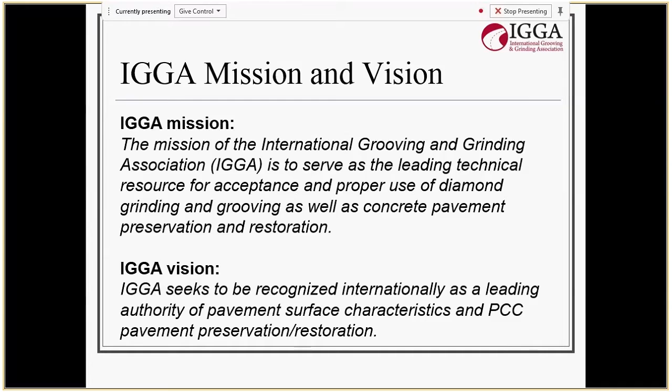And we're a small organization. We have offices located in New York, Chicago, and Arizona. And it's a small group. We have an engineer, Larry Scofield, which I'm sure many of you have met and worked with over the years, who's been involved for quite some time. And we have consultant promoters that work with us time and again, and many of you may know Dan Frentress, who used to be the executive director of the Concrete Paving Association of Minnesota, who is now a consultant. He oftentimes provides services to our organization as well, and a great addition when he does.

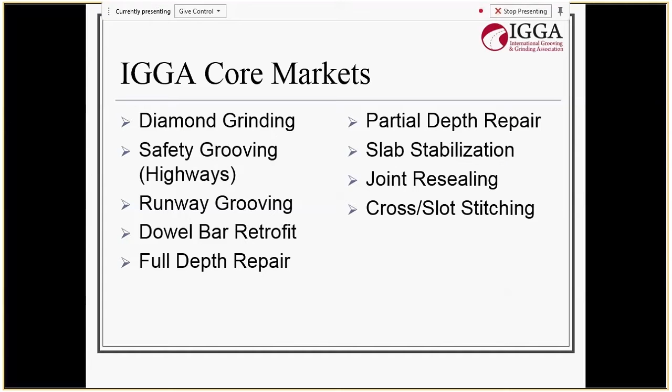And that boils us down to who do we work with and how do we operate. We have a number of strategic partnerships. Of course, the American Concrete Pavement Association is one, and there's a number of chapters that are affiliated with the ACPA, and we work very closely with those organizations, such as we do with the Concrete Paving Association of Minnesota.

And the unique difference here with this group is the fact that we take industry, associations, my members, and we work fully with a number of different states involved with the NRRA. And that allows us to do some things that we can't otherwise do with the other groups listed here. One of those, of course, is the partial depth repair research that we've undertaken as the NRRA.

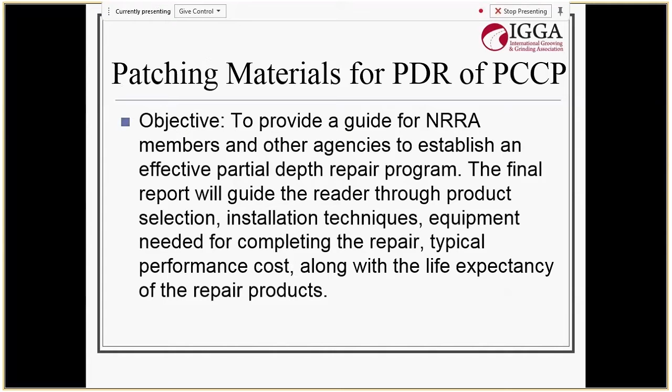And what we have is the objective here, and this was discussed yesterday, so I'm not going to go into detail at all related to the project itself, but just to give you an idea of the patching materials for partial depth repair program that I was involved with, you can see what we're looking to come up with. And essentially what we've done is gone out and created some faux repairs and then invited a number of different manufacturers to come in and to bring their products and to show their wares, if you will.

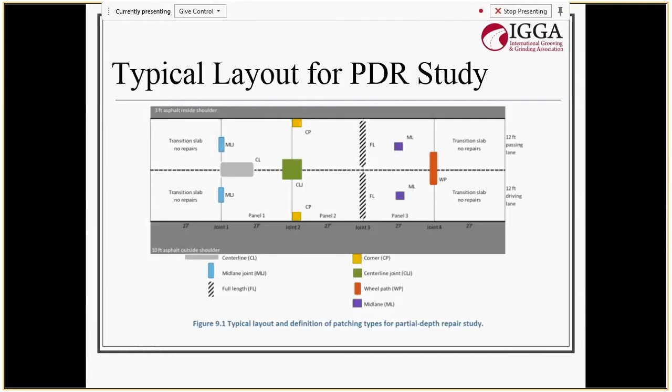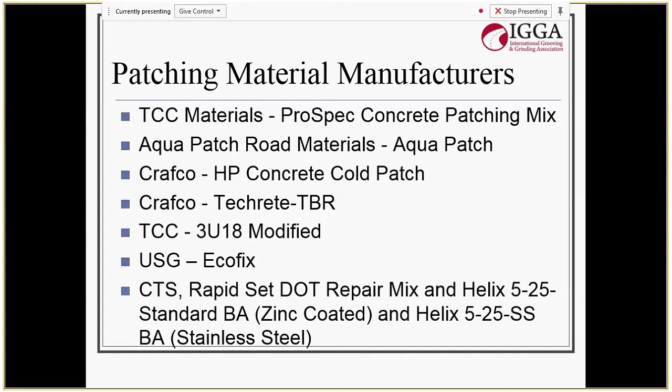And I am sure during the process of installing these products, there was a lot of uptight, intense people. And rightly so, okay? They're representing their company. But again, you have people that are trying to do the best they can to impress and to show the departments of transportation that are there on site and that will be reading the reports years later, how good they can help sustain the system.

So at the end of the day, with this particular project, this is what we're looking to have as outcomes. We're looking to have a guide that provides information to DOTs that are either involved, that are in this room here today, or that choose to pick up this guide years later, and they can learn how to establish a partial depth repair program. They'll know what to expect from some of these products and so on.

Just really, really cool stuff, beneficial stuff that I think you'll see years worth of benefit as we look forward, as we move down the line, as we head towards retirement at some point in time. Not soon enough. We will remember what we've done here today, last year, next year, and so on.

So that brings up the what's next. What are we going to do here? Okay, so we have products planted in the ground. Now we're going to monitor them. And we're going to come up with a report and provide benefit to those that are in the room and outside of the room as to what we're doing. But the way I view this, it's much broader than this.

What's next? Okay, so we've built these sections. Well, right now, in this very room, we have manufacturers from big, well-established, name-brand companies that are here trying to listen to find out what your needs are. And while we were having coffee just a few minutes ago, one of these individuals who's in this room right now said, man, I've got some stuff. I just wish I knew the needs better.

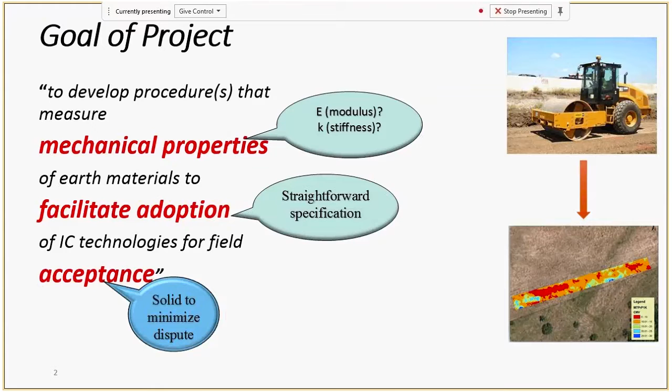So what's the goal of the project? Very quickly, first we wanted to develop a procedure that measures mechanical properties. What that means—this is coming out of the RFP, not my word—they want to measure stiffness or modulus of the material with the roller. They want to basically facilitate the adoption of the IC technology, meaning it has to be a straightforward, transparent specification so you can implement it. And the last one is for field acceptance. That got us a little bit, because as soon as you're talking about acceptance, real money gets involved, so we have to be careful to minimize disputes. We don't want every project to go to referee. So it's a little bit of an ambitious project, but nevertheless we're lucky enough to have gotten the project to work on.

So the other group I have to thank is Caterpillar—Brian is here, thank you. In order to do what we wanted to do, the conventional IC roller is not enough; we need access to more information from the roller. So we approached CAT, and they were very generous and agreed to provide us additional information, namely the load—if you want stiffness, you need to know load and deformation. One without the other, you cannot do it.

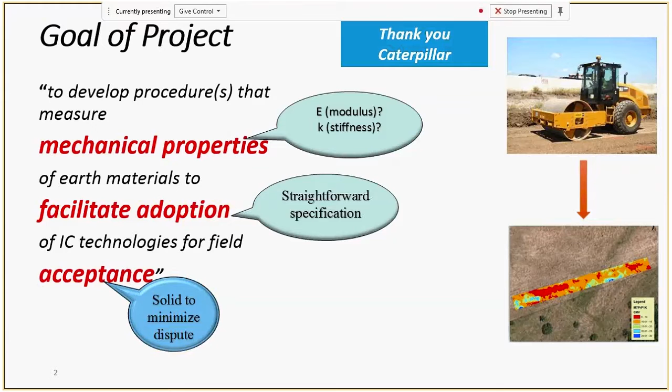So this is the experimental roller, and they worked with us very closely, and we got the data that we needed to collect. That's what we were doing.

So when we are talking about getting to the model, what we do right now is great for uniformity. To get the material property, you need to have a model. You have to have a mechanistic model.

For the last 10 years, we have been working, thanks to the generosity of a lot of different funders, on a finite element code that basically models the roller on top of the soil. Models are great, they make good movies, but they are only as good as the prediction.

So we have to calibrate these models to do it. I gave a presentation last year on some of the runs on the supercomputer of the UT system, which is the second fastest in the world right now. Some of them take around 8 to 12 hours for just one run.

When you have a vibrating roller that is moving and you're trying to do it, we don't want to do that for every project, so we have to come up with something. The first step is to get the model and to answer some of the questions.

The basic question: what's the depth of influence of the roller? That's very fundamental. Things like that. But we have to have a calibrated model to answer those things.

And that's where the MnROAD sites came in. We started doing instrumentation at the site to measure what the response of the soil is at different levels. I'll go faster.

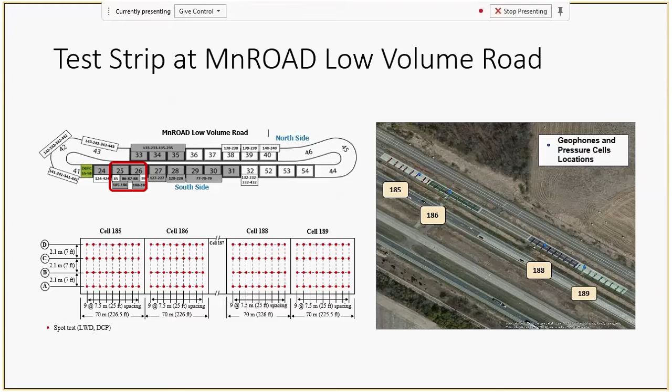As a geotechnical engineer, the first thing we learn is that soil is darn variable, and we cannot do anything about it - we can manage it, we cannot just solve it. We manage it.

So we put the instrumentation in place. This instrumentation is thanks to our friends from the Federal Highway Administration - we have a project from them, and we developed some instrumentation together.

So we have a system that simultaneously measures the vibration of the roller and synchronizes it with the vibration of the sensors we embedded in the ground, so we know the relative location of the roller. We just have the roller operate, measure it over time, and synchronize the distance.

What sensors do we use? We have an accelerometer - let me point at the thing so you can see. This is the whole system. You basically put it on the handle of the roller, and there's an accelerometer that we install.

These are the accelerometers - industrial accelerometers. These are the 3-dimensional geophones. They measure velocity, and we put them at different levels.

This is the pressure cell - it ended up that we didn't have the pressure cell in the program, but because travel costs were minimized by doing all the testing in one place, we took the travel money and bought the pressure cells and put them into the ground to get more information. We put the 3D geophones at 2 levels, and the pressure cells at different levels.

Our sensor here, the accelerometer, is on the roller. There's a GPS here, and there's a GPS next to these sensors - these two GPSs talk to each other to synchronize so we know where the location is.

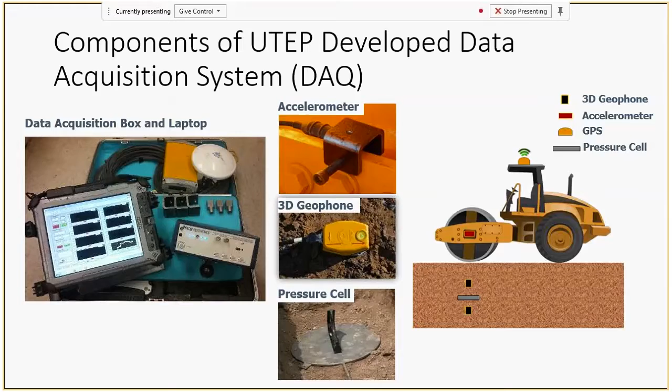Okay, so these are some of the pictures that you see, some of the work. We have a group of 4 old-timers and 1 newcomer. Mike was the newcomer—he's a guy with a PhD who's not afraid of pick and shovel. I was complimenting him; he was very helpful. And then we have Bob, Doug, Jack, and Len.

These guys don't sit in their office, they come and help the researcher. We're used to people showing us to the side and saying good luck, if you need something come find us. These guys actively bring the equipment, and very quickly we put in all the sensors into the ground, and they protect it.

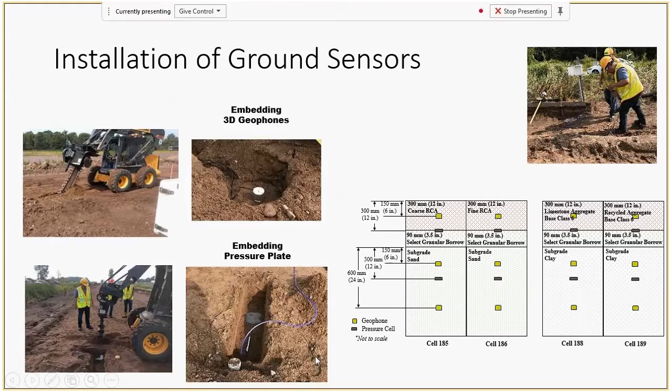So these are some of the types of information that you get. This shows you the vibration of the roller, the sensor on the roller. This is a close-up of it. And these are the vibrations of the 3 geophones at 1 level—actually there are 6 of them. You see that the vertical one is the white one; there's nothing, then you get a response, and then after it you lose the response.

This is a close-up of what you do, and no equations. Okay.

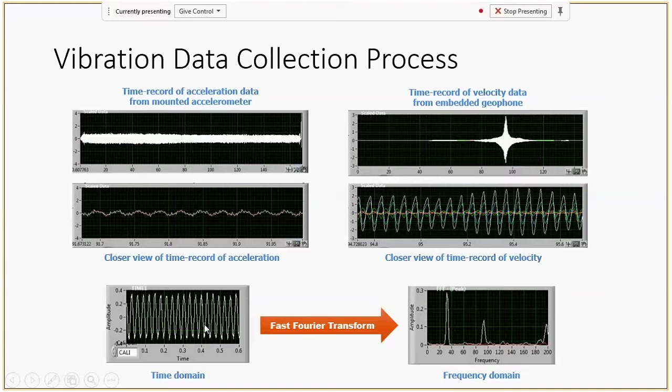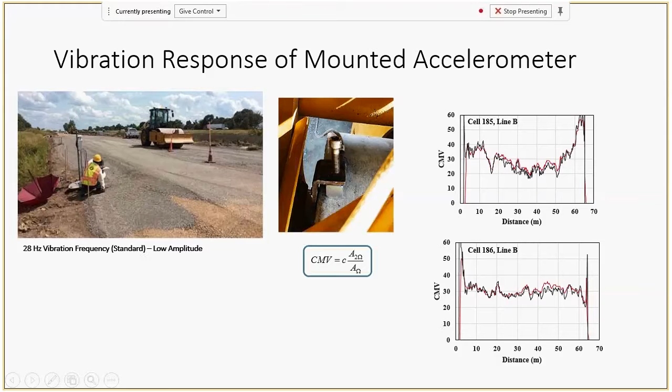So the first thing we did was make sure that all the systems are working the same. This shows what the output comes from the CAT versus the one that we get. They're fairly close, so we're comfortable that we can interchange the data between the different systems.

And basically this is one of the responses—this is the higher deflection, this is the one closer to the sensor. Now that we have that, we can go and start doing the calibration.

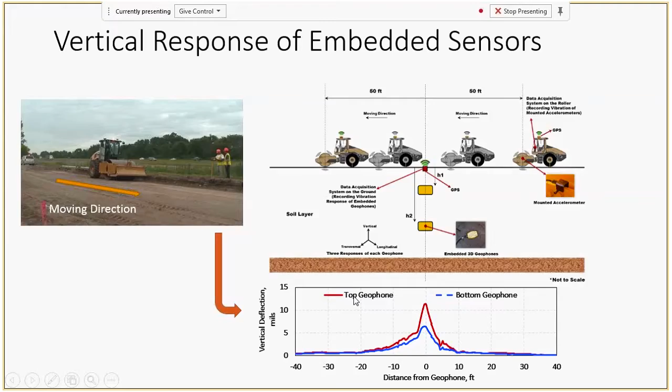Back to my model—these are the types of calibration we do. We don't believe in just accepting what the material does, so why do we design? That's one of the pet peeves we have as geotechnical engineers. If you design for 10 KSI subgrade, well, you should get 10 KSI, or design it for 5 KSI.

So we routinely see in some of the work that we do, the subgrade is designed, and you either get a lot more modulus out of it or a lot less. So you're either not putting enough pavement or you're putting too much pavement. That's one of the benefits we're going for.

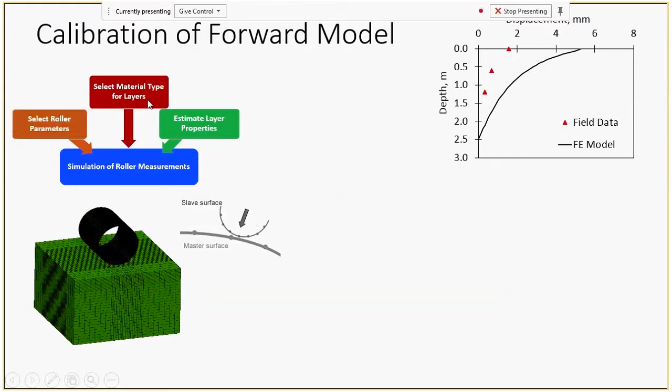And this is one thing we see—I'm wrapping up. The type of calibration you see, there are some differences. This is what the model says, this is what we are measuring, and this has to do with the fact that we use the laboratory modulus and the field modulus is different. So we have a transfer function we are working on.

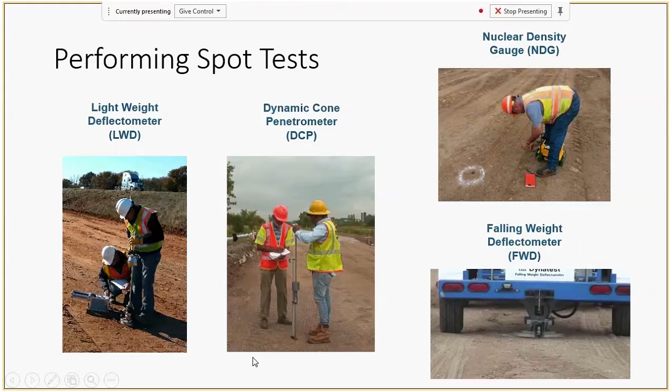These are the types of correlations we get, and basically we start mapping and looking at the different parameters. We do a different way of looking at the data, but that's beyond the point—all the field tests that are done.

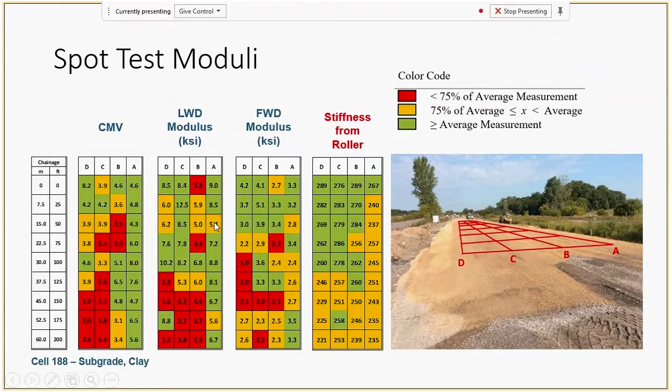And basically, one thing I'd like to show now—we start getting stiffness results from the roller for the first time, at least for us. So we can use it, and we thank you guys for that. Sorry, I went over. That's it.

No more. You're never going to do it again.

And what was wonderful about what Soheil did is he brought in research that was not being paid by NRRA or any of the states or associates, but stuff that we could tie back to related to MnROAD. They actually bought some of the sensors for us, so we didn't have to buy them. So that was a benefit also.

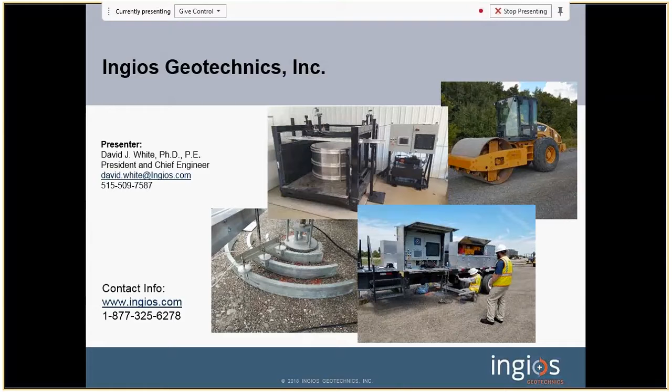All right, good morning. Thanks for the opportunity to share with you some of the things about our company and our involvement with NRRA. I live just down the road, so I couldn't pass up the opportunity to be involved in some small way on the project.

So I'll tell you a little bit about some of the things that we're involved with that we implemented on the project. The first technology is what we call our automated plate load test system. There we're bringing plate load testing out to the project in an efficient way. So we were able to perform some of those tests on a few of the different sections.

The middle image is what we call validated intelligent compaction. The first time I was out at the low volume test track was, I think, 11 years ago, when some of the research that MnDOT was working on was still in the implementation phases. So I've been involved with IC for quite a long time. Our company now has a kit and a system that we put on contractor machines to output in real time mechanistic design values. So we brought that and we're able to use that on a few of the sections.

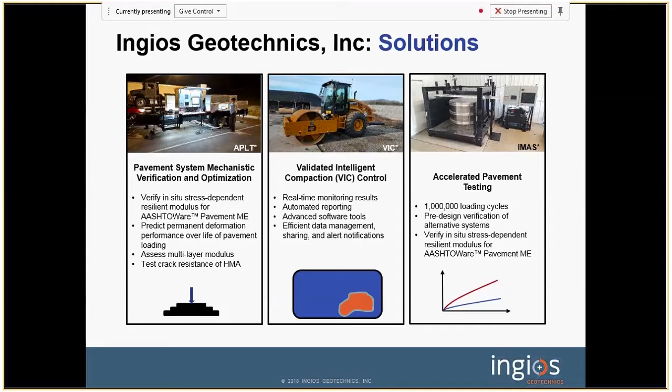To the right is our IMAS system. We do a lot of testing on geomaterials, trying to understand modulus, permanent deformation, stress relationships. And some of the things that we do with the APLT, we're not able to do with the IMAS system. The IMAS system, we can do 1 million cycles or 1 million ESALs over the course of about 10 days. So when we need to do accelerated testing, we bring some of those materials back to the lab.

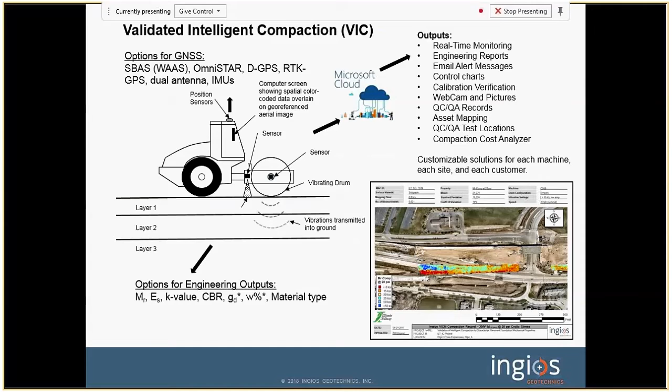This is a little bit about our VIC system. It's a little bit different than what's available with some of the other equipment. The outputs are modulus. It depends on what the project requirements are. We also have the ability to sense what material type we're in. So if we're transitioning between virgin materials or recycled or subgrade, that's actually collected with the machine using some advanced algorithms. And that information is all routed through Microsoft in a secure environment and presented back to the client in the form of a report. So we generated several of these for the sections that we were able to work on out at MnROAD.

Just a few more details in how this process works. There's an integrated sensor package that's installed, allows the operators to see information that's important, help them with their process control. It's field calibrated typically with APLT tests so that we have confidence and can provide a professional engineering report for the calibration. We display the results, we auto-generate reporting. That's such a huge element of intelligent construction, the data and being able to process that efficiently. Ultimately, we'll want to reduce risk.

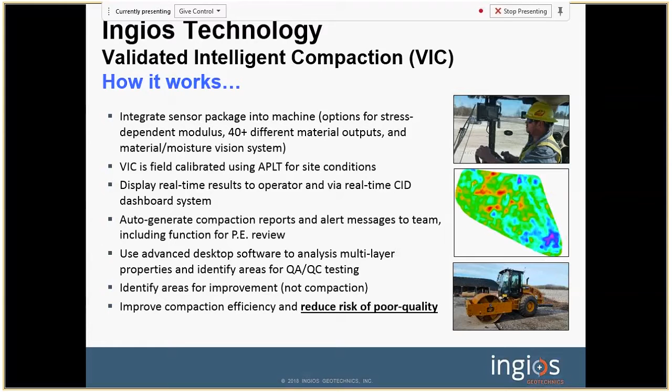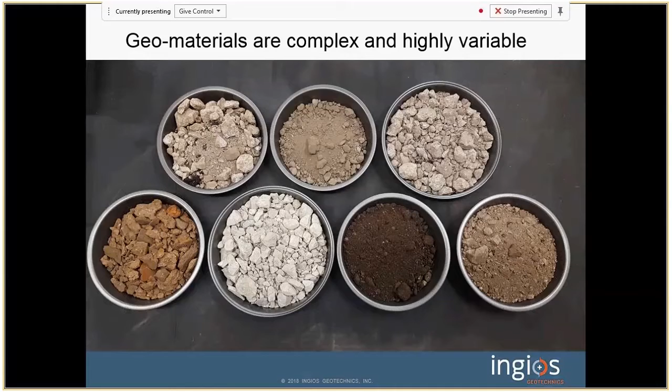When it comes to pavement systems, my mindset is you can't build good pavement systems if you don't have high quality foundations. I'm just convinced of that from testing all over the United States and other locations, that we still have a serious issue with pavement foundation construction. I'm going to talk about that later this afternoon and how we can overcome that. One of the issues is our materials are just really complicated. All of the recycled materials that we work with, the gradations, the blends of recycled materials, stabilizers, complicated stuff. So as part of the VIC, we've been cataloging and have calibrated 40 different materials now, covering a range of base and subgrade materials.

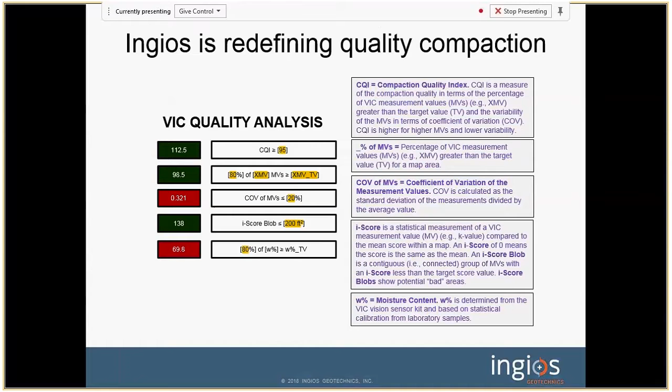Through this process, we've discovered that traditional methods of defining quality probably need to be updated a little bit, especially in terms of the changes that have occurred in design. So I won't go through all the equations here, but we've come up with a set of what we think are really important quality indicators for pavement foundation systems, and there's 5 of them. And typically we color code them red or green so that people can quickly determine if they've met those or not.

And I mentioned all this information's got to go to the cloud. So we've been working with government agencies to develop tools that work for their specific needs. So this display here is a set of icons that allow the agency to access different bits of information on the project. Some of it relates to what's happening right now. I want to see compaction mapping, to what are the trends over the last several weeks in control charts.

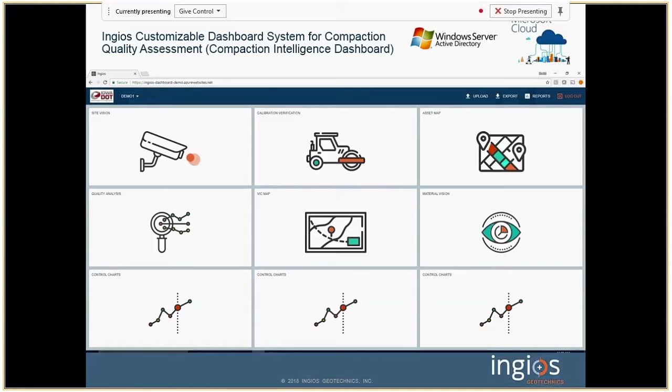And what was so interesting about this is all of this passed the tollway's traditional QC and QA methods, but built into this foundation system were some defects that we believe are going to cause distress to pavement systems. So we're really after trying to identify those, help the contractor locate where they're at, and then make decisions to improve those.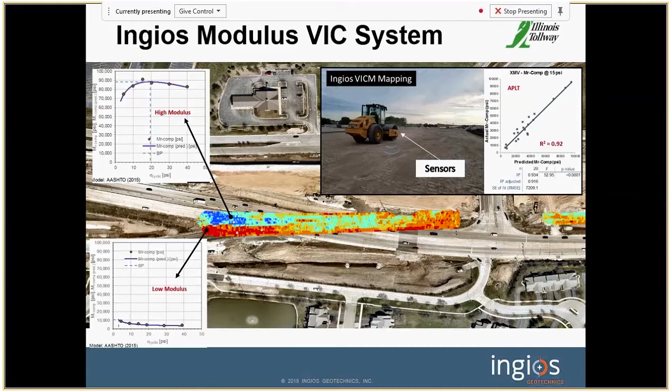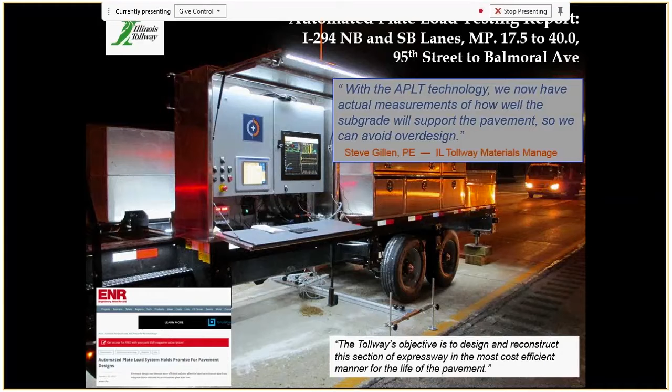One of the really interesting things, this might surprise some of you, is that resilient modulus isn't constant over the life of loading. It actually changes. So we've been trying to understand that and relate it to permanent deformation under loading as well.

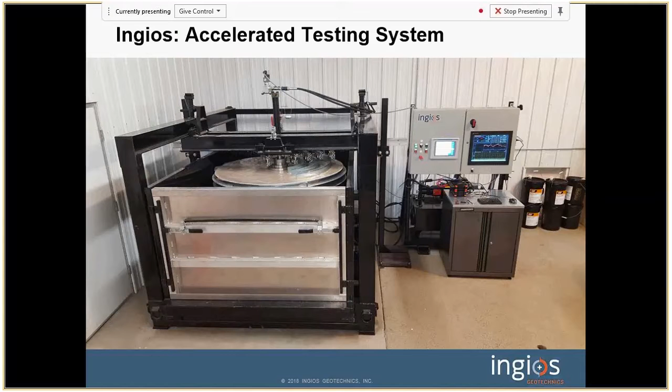I'll talk more about this this afternoon, but we have what we call tenets of measurement. And again, these are things that we believe are really important to making sure pavement quality is where we want it to be. Pavements last a long time, and a lot of it has to do with directly measuring what are the important engineering properties.

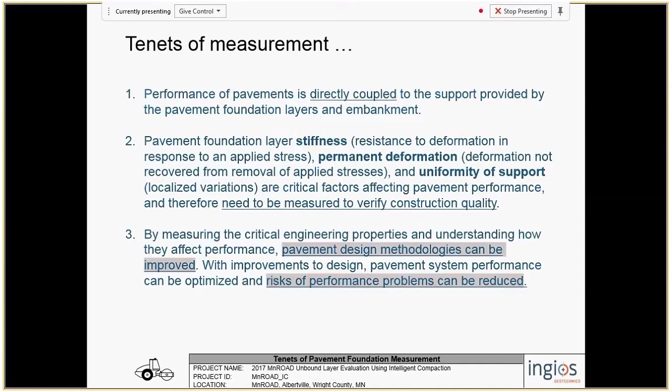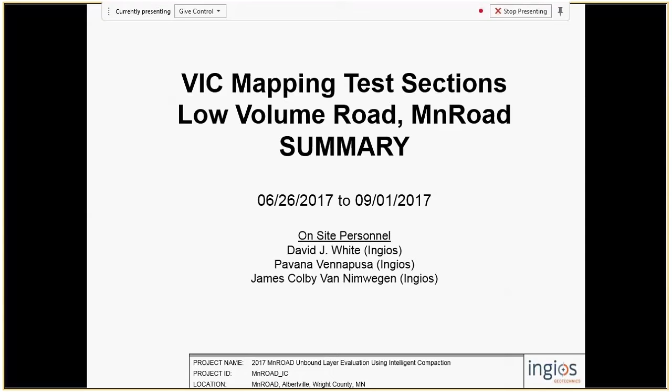So just to wrap up, here's a couple snapshots from some of the things that we saw out at MnROAD from this summer. You all know there were a lot of different sections. These are some of the profiles that we had the opportunity to do the mapping on. And it was really fantastic. Virgin materials, recycled materials, stiff subgrade, soft subgrade, and really, really soft subgrade.

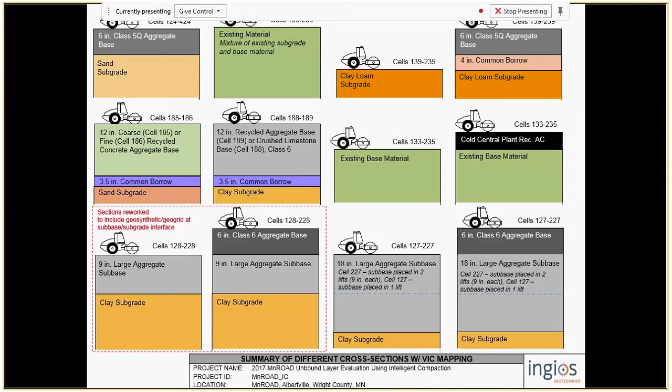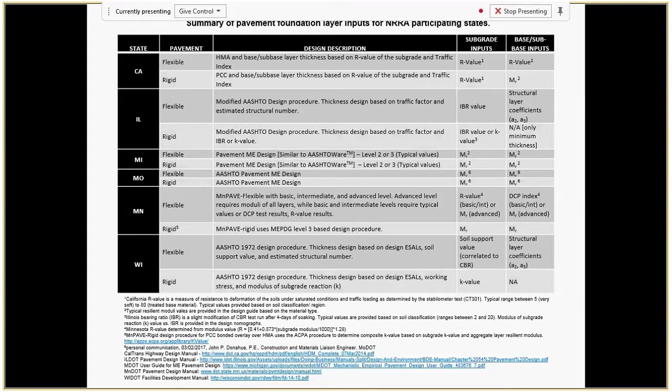We looked at the participating state design methods, because really what we wanted to do is be able to relate the measurements to whatever the design methodology was for those different states. So you'll see K value, MR value, IBR value, R value, CBR. The states that participate have different sort of mechanistic values of interest for their design.

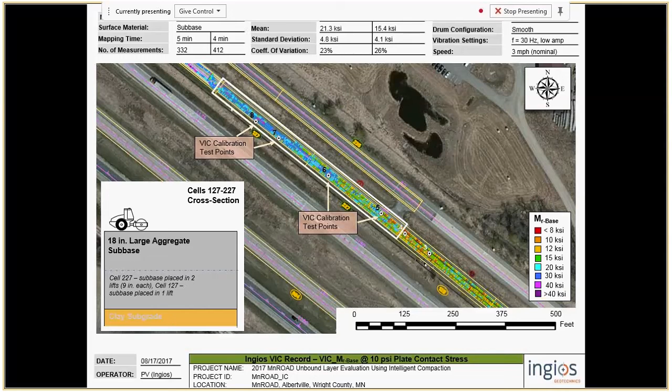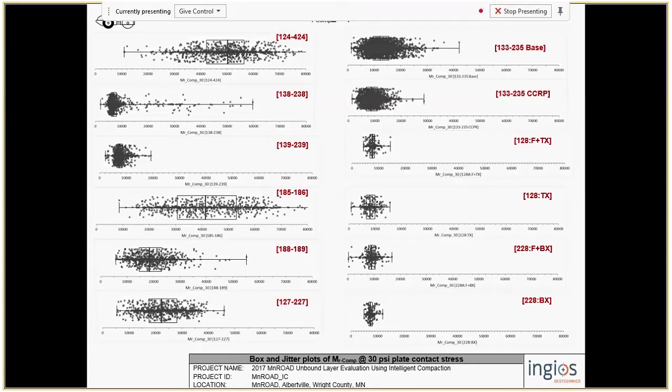In the end, from all these different sections, these are statistical box plots of modulus. So within a section, you can see the spread of the data is an indication of the variability. All the different sections were quite different. Some were uniform, some were highly variable. And that's data that we continue to look at today. And these are just some of the locations that we've been working at here for the last couple of years.

Alrighty, our last testimonial was Luke Pinkerton from Helix. And he was quite instrumental in working with the fiber test sections, his whole industry, in fact. But the idea is that we haven't used a lot of fibers, so again, that's why we really need industry to help us out in these areas that are new and upcoming.

So, okay. Be quick if you can. Yeah. You're in charge of lunch. All right. Yeah, thanks, Ben.

I really just wanted to take the opportunity to thank the NRRA and Ben and the whole team here for such an opportunity to get involved in short order. Our company makes twisted steel micro reinforcement. It's a 1-inch long steel reinforcement that's shaped like a screw that you mix into concrete. And we first came into contact with NRRA about this time last year. We joined the organization after I had an initial meeting with Ben and the team.

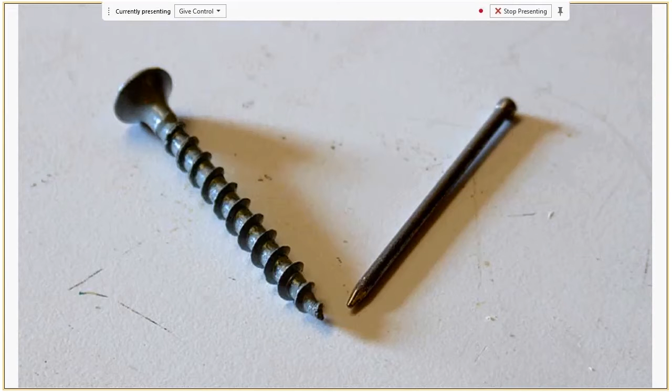And then I joined the first rigid team conference call, and they were talking about these partial depth repairs. And I'm scratching my head a little bit, and I'm like, well, this would be a great opportunity to look at how our product Helix, which is, this is what it looks like. It's 1 inch or 25 millimeters long, zinc coated. We also make a stainless steel version of the product. How it would benefit these partial depth repairs.

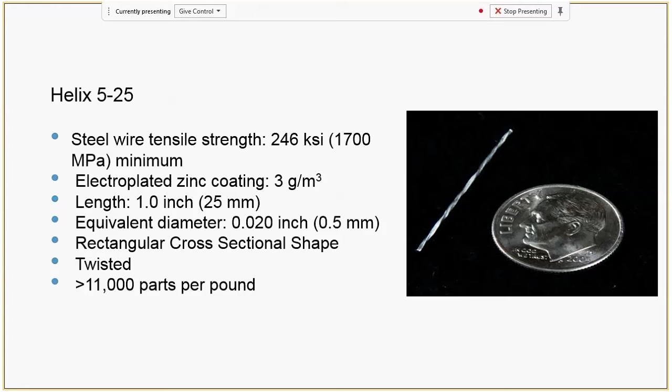It drives me crazy. I drive to my factory and every single joint is broken up on the highway there. There's got to be a better way. So I've been working to try and get involved with DOT research for years. We have the product approved and in installations in about 10 states at this point. But to get into a section, an actual official research section like this has been very difficult. So the opportunity and how it came up so quickly was tremendous for us.

And it just so happened at the time we were working with CTS on another project out in Los Angeles that was more architectural, where we had done some testing, incidentally, right here at Element Labs to determine the increase in flexural strength and compressive strength you get when you add just 2 pounds of our product into the standard rapid set repair mortar that they have, which is very similar to the DOT repair mix. And in essence, what we get is a 57% increase in that flexural strength. And that's something that's very unique for our product.

There are a lot of fibers out there. Most of the fibers will focus on what happens after the concrete cracks. This product actually significantly increases the initial flexural strength of concrete. So that means we can make concrete thinner, we can make it more durable, but then it also has that durability and that toughness benefit that comes after the crack. So you get sort of both what we call the proactive benefit before the crack and that post-crack benefit that's more traditional for fibers.

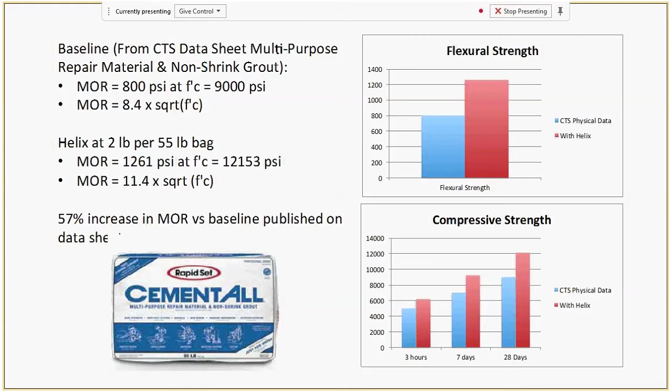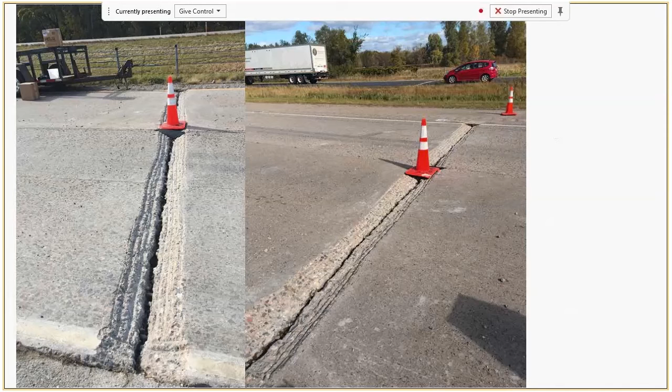So we were able to work with Ben and Jerry and then the team at CTS; it so happened that one of the cells was available, cell 13 of the partial depth repair section. Within a matter of a few weeks, we got all this organized and we were able to install these repair sections. So for those of you who didn't see this yesterday, this is kind of what these repair sections will look like. Some of them were long like this, and then there were some smaller ones where they went and milled out a section.

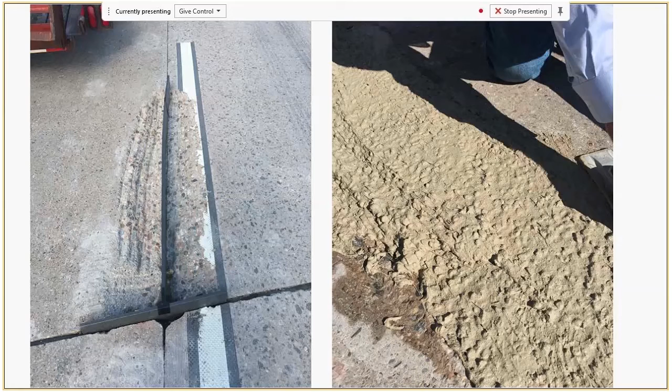And then you can see the section of the Helix reinforcer. You can almost see the Helix in there. It's hard to see once it's in the concrete. A lot of people ask me, will this stuff stick out? Will it pop a tire? But once it's finished, you don't even see it below the surface.

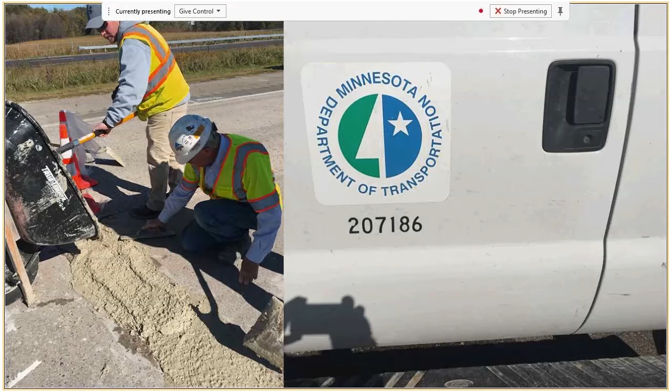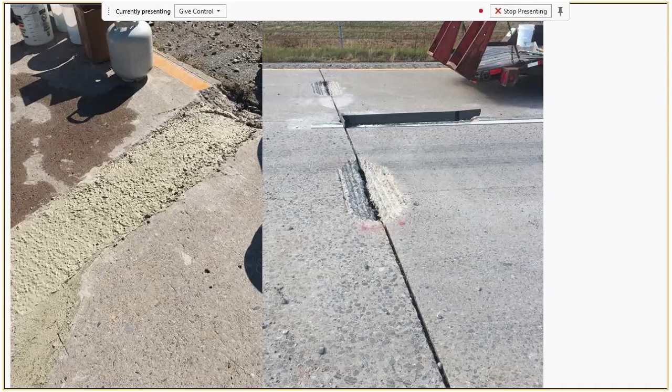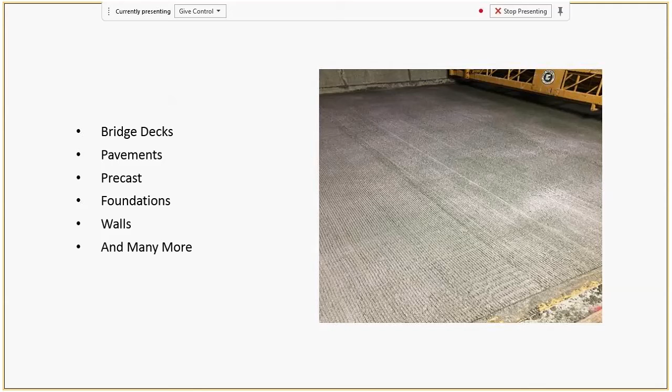We're lucky enough to get 2 sections. One section has our standard product, which is made of zinc coated steel. And then there's also a stainless steel product that we had. So we'll be able to compare the difference between the stainless versus the zinc coated. Obviously the zinc coated is a little less expensive, but the stainless will provide us sort of the best corrosion resistance. And what better environment than here with all the de-icing agents that this will see over its life. So the CTS team was really great to help us install it, and that's what it looks like. We do a lot of other applications with this based on that modulus of rupture and that post-crack benefit.

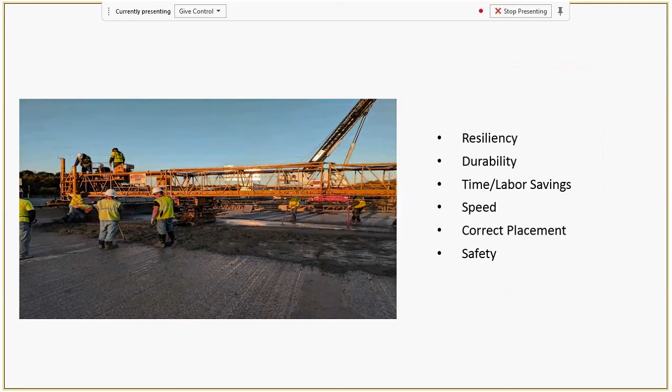Going along with that repair technology, I'll just mention that Missouri, who's also one of the members of the NRRA, has tested, evaluated, and is now using Helix to do partial depth repairs on bridges. Very similar concept. So we're seeing more and more implementation of the product in that sort of realm. This is what the finish looks like, the finished product.

So again, I'd just like to thank NRRA for the opportunity. We're really looking forward to participating over the life of this research project and hopefully getting involved with more in terms of the fiber group, as well as hopefully getting more full depth pavement opportunities. So thanks. Yeah, thank you.